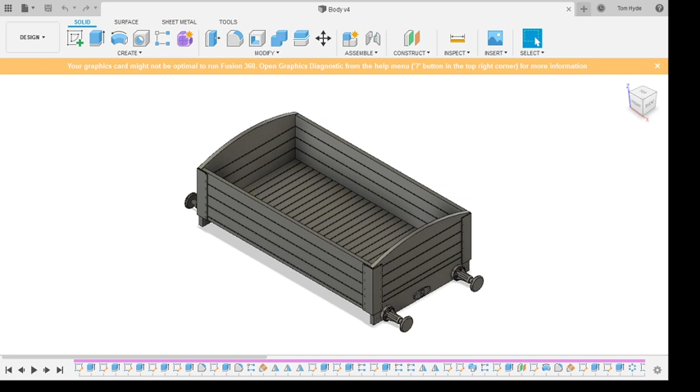1328, this one is. So last week we got through the main process of creating a wagon body. Did all the planking internally and externally, buffers, which was a bit of a faff, but we got there in the end, and did some of the riveting on the corners as well.

Since last week, someone on my RMweb thread pointed out that these rivets don't quite line up properly with the individual planks. So I'm just going to go back and have a quick look at that now in the diagram. And of course, they are right.

So the top ones need to go up very, very slightly, and the bottom ones need to come down very slightly.

One of the useful features of Fusion 360 is if you click on a thing - I think I started with this corner - and have a look down here, it tells you where that thing is. Hopefully. This doesn't appear to be playing. There we go. So these three dashes here, you can see, it's highlighting the thing that is a part of.

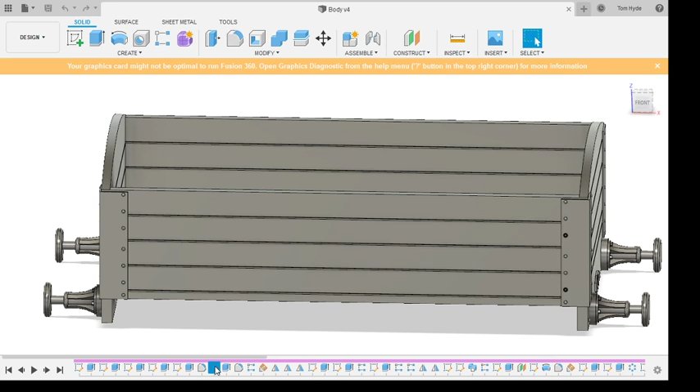So this bottom one wants to come down a fraction. Let's just put some slightly random numbers in here for now. Let's go for 0.75. I should always stick to my own rules of 0.25mm spaces. Really.

Let's see if that's done that. Updated graphics. That's better, not perfect, but better. So that pattern there, as you can see, I select the thing down here and it shows me where it is. That's useful, especially when you've got a lot of patterns going on.

So I want to reduce that distance very slightly, so I can go for 3.75. And let's see where that puts us. I have to do a lot of recalculating for this because it's calculating this side and the mirror and the other mirror over here. That looks much better. That one's pretty much spot on. Those two are pretty much spot on. That one's very close, and those two are pretty much spot on.

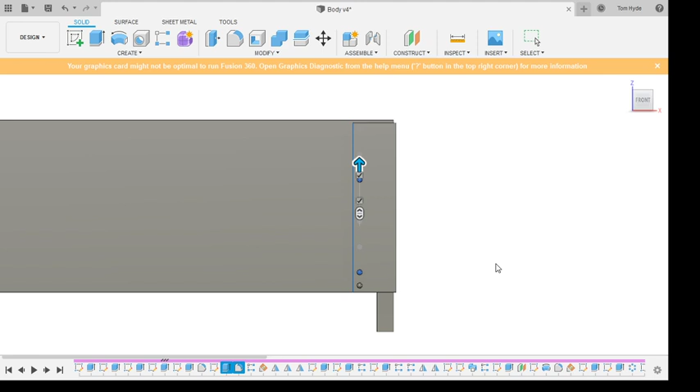We're just making tiny adjustments, going back and forth until we get something approximately right. Now, what did I do with my ruler? So D1328. Excellent. Right, so this bottom plank has 2 rivets. This one has 1, this one has 1, and this one has 2, and they will line up properly.

Perfect. Let's give that a save. Put some new version number in for me, which is all very nice and lovely. So, what to move on to next?

I think let's do some of the strapping on the sides. Yeah, let's go for that. Right. That's going to be some more extrusions and more sketches and so on. This is the part where CAD gets a little tedious, but it all has to be done.

So, actually, let's have a quick look at that diagram. These straps on the sides all seem to have rounded ends, which means we can't just use a normal rectangle, we have to do something a little bit more creative.

Let's cut a circle out, center diameter, or just press C. Now, the thickness we want on those straps is 0.75 millimeters, so we can do that. Hit C again. 0.75 - it doesn't matter where I'm putting these for now, I can put them anywhere really.

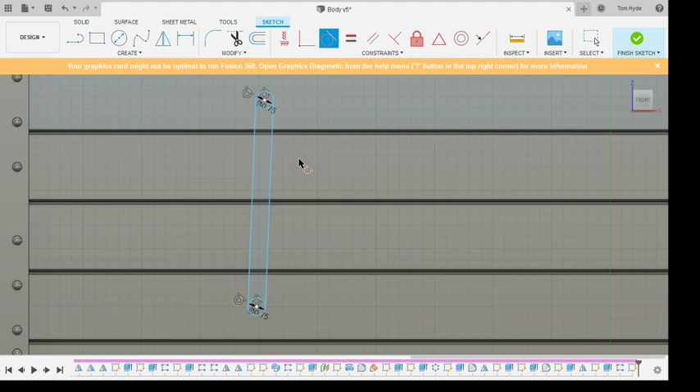And now we're going to make that parallel to something it should be parallel to. Good. Let's dimension that off the bottom there. Let's call that 0.5 millimeter. Dimension that off the top. Let's call that 1.75 millimeters.

That from the end is 11 millimeters. There we go. Job done.

Extrude. Let's pick that, that, and that. And extrude by 2.25 millimeters. Now that's not really what I wanted to do, because we've cut these planking lines in here, it's going to create gaps behind this section, which could cause issues for printing, but also makes the export mesh a little bit more complicated.

So I'm going to try and avoid that if I can, by picking a symmetric extrusion, keeping the same distance both sides, and a join operation. So you can see now, if we zoom right in here, this is filled in, so the structure should stay pretty stable.

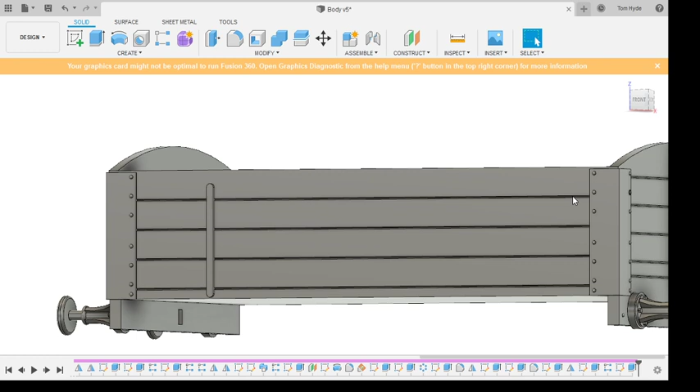Oh, hello, Killian's turned up. How are you this evening? Rather a good wagon, wouldn't mind having a few. Well, you might be able to have a few after I've done this, we'll see how it goes.

Next point, add rivets. 1, 2, 3, 4, 5. Equally spaced and central to the end. So, create another sketch.

Another useful tool in Fusion 360 if you're creating something with a circle. Let's zoom right in so you can see this. I don't know how well this is going to show up because it's not that visible. But you can see at the moment my cursor has a little blue square around it, which is just a generic point - it's snapping to a 1mm grid at the moment. If I move onto the edge of something, it goes to a blue cross, meaning it's now snapped to that point. There are various other points, like here, it goes to a blue square again - that's the intersection between this straight line and the curve. Or if you go to the middle of a circular thing, it turns into this blue circle.

So that is the point I want to start at. I'm going to go for a standard 0.4mm rivet. Extrude that, 0.2, round it, 0.2, good.

Pattern. Again, I'm using a feature pattern rather than faces - that's more or less personal preference, really. And extent, so we want 5 of them, and let's say 20mm. That's quite a bit too high.

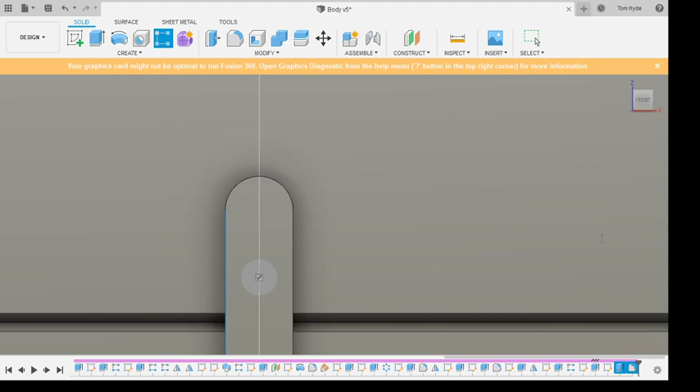I need to line that last one up with this point here. So let's drop that down to 16. Nope. 11, 10. So that line is 10.75mm. So there we go, let's do that.

That's looking all fine and dandy. Right. Okay, that's one of those, and there's an identical one at the other end, of course there is. So let's get the mirror tool back out.

Pick features. Let's see, that one, that one, that one, that one, that one. I want to mirror that in the central plane there. Done.

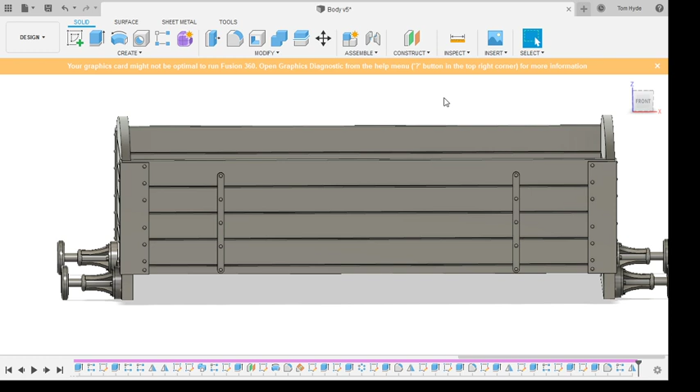Let's go for the central strap, I think, first. Pretty much the same thing again, just in the middle. And unfortunately this one's slightly shorter, so I can't just use the pattern trick and put 3 of them in here.

So you can see, well, you might not be able to see, but when you're drawing a line here, you have the normal blue cross snap to line thing. If you come near the edge of the circle here, it will switch to the circle with the line next to it, indicating tangent, and it puts the tangent relationship in here as well. But obviously it's only done that for the points at the ends where it's snapped to. It's not done that at the start, so we need to do that manually for the start there and fill in there, which is over constraint apparently.

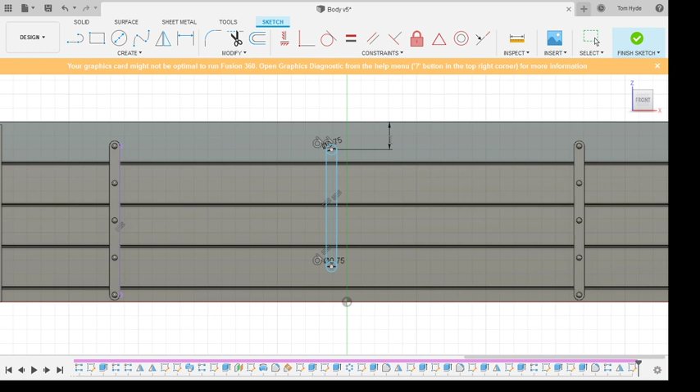Okay, I think it might have done that as I started. Yep, okay, that's fine. Parallel again, let's make it parallel to that. And get the dimension tool out. So that top one is 0.75, and the bottom one is 1.5-ish. There we go.

Looks about right. Yes, I need to dimension it to the middle as well. Because I started all the way back last week, with the centre of the base in line with the centre of the origin, I can just dimension this to the origin, picking that distance divided by 2.

Let's extrude all that stuff again, 0.25.

Do some more sketching and extruding. Let's start at the top this time for no good reason really. That will do.

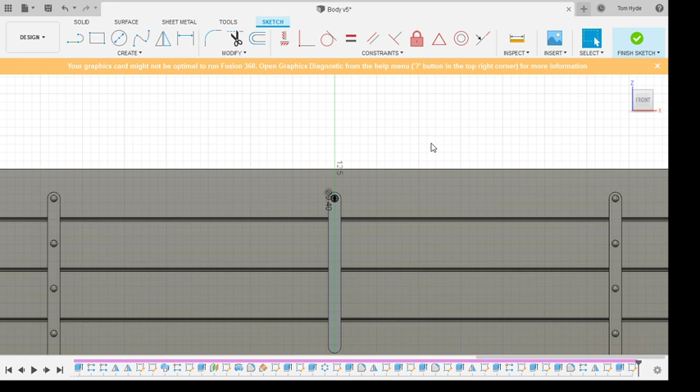Extrude that by 0.2, and around that by 0.2.

Get the pattern tool out again. Pick that and that in this direction. And this time there are 4 equally spaced, so let's pick 4, and...

It's going to start going down, isn't it? So let's say, let's call that 8 millimeters. 9. And so 5, I reckon.

That's a little bit short. That's about right. So I probably should dimension that properly, but being a little bit lazy today. So that will do.

Killian comments about wanting one of the Lady of the Lakes models. Yeah, still working on that. I don't know if you follow Ruston's thread on RMweb, but he's currently building the first prototype of that. He's built a set of frames for it. So he's done the chassis, I've done the body. I think the build of that will be going up on his thread first if you want to keep an eye on that one.

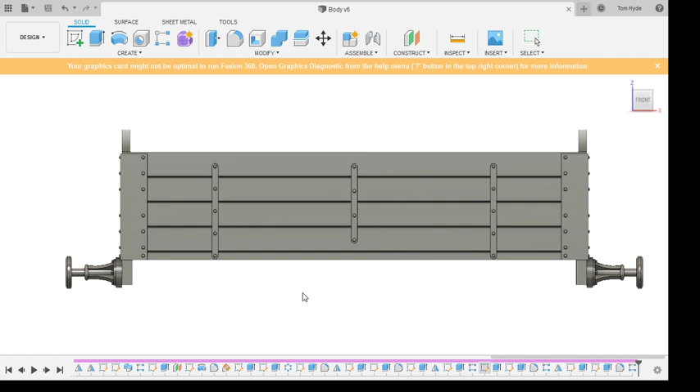Okay, so I have a decision at this point. I could do the main strapping for the door here, or I can mirror these 3 things onto the opposite side first, or I could do the mirror after the door. I'm going to do the mirror now because A, it means I don't have to backtrack too far into the timeline when I want to find the things I'm mirroring, and B, if I come back and change any of this, it only has to recalculate a small number of things in the mirror, whereas if I wait until everything's included, it has to do a whole lot of recalculation, which has crashed my laptop in the past.

So for now, I'm going to pick up on that one there. I want that, and that. And they all get mirrored in that plane there. Job done.

Right, now let's do the door.

Now, door strapping, let's go back and have a look at the diagram first. See, what I should have done, if I was clever, is scan this diagram in, scan a few of the photos in so I could show you what I'm actually looking at while I'm doing this. But, well, I'm not particularly clever because I haven't done that, so you just have to imagine it yourself.

So this door strapping is square. The outside parts start just above the floor panel, and the bottom parts go down to the hinge. So let's do the outside ones first.

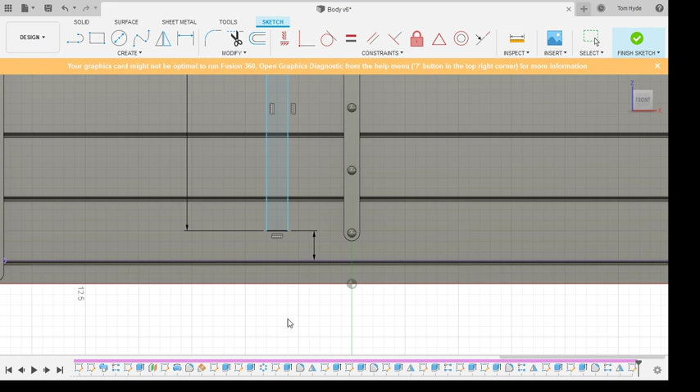Then you can go back to your dimension tool, hit the bits you want, put it at 0.25 above there, and it'll let you put it where you want it. Bit of a faff, but I don't really see any better way of doing it at the moment, so that's the way it has to be.

Let's measure that distance, which is really hard to read. That's 15, 16, let's call that 17mm between the two door straps. I'm going to call that 17mm.

There we go. That looks a tad too long according to the pictures, but not according to the drawing. Let's just nip a tad off the top of that. There we go. So that will do nicely.

What am I doing? Right, extrusion. That and that, 12.5. I think I forgot to do the trick. Yes, I did, symmetric 12.5. And there we go, it fills in that hole again.

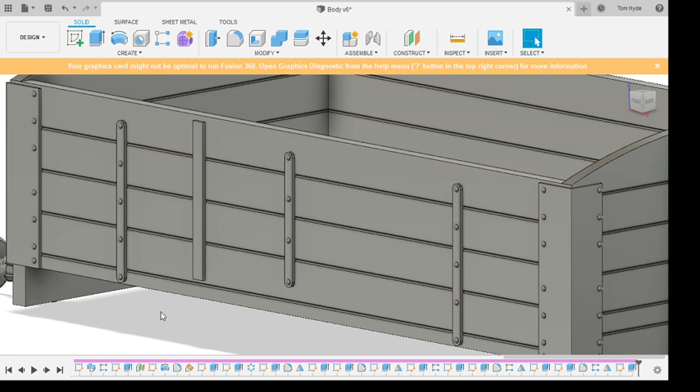So that's probably riveted out, isn't it, as well? Yes, it is. How many have we got on there? 1, 2, 3, 4, all central to the planks they're on. That kind of makes things easy-ish. Can't see that in the photos, it's a little bit too dark, so let's trust that drawing.

Dimension that to be in the middle of this plank, which I think was 3mm tall, which means I don't want that dimension. It means I want that dimension to the middle there, and it is already bang in the middle. Perfect.

I'm forgetting the no blue lines rule because I haven't dimensioned it this way. There we go, let's finish that. Wait for my laptop to catch up. Extrude.

Round, again. And then we want to pattern that upwards. Again, let's click those two, take that pattern - there are 4 of them, and the distance between planks is 3 millimeters, I think, so that must be 9. Quick basic maths.

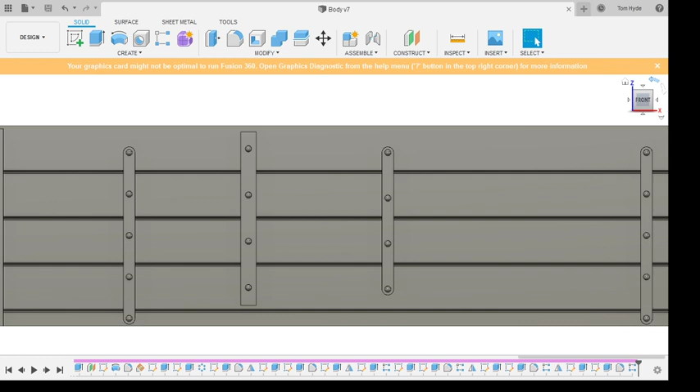Okie doke. Right, keep sketching. Let's do another rectangle - I'm just going to put it somewhere arbitrary at the moment.

And then start dimensioning. So that is going to be 1 - I should probably check these before I say these things. That is going to be 1. Is it? Yes, yes it is.

That's now wrong. What I meant to do was that - 3.4, which actually probably was where that was anyway. Never mind.

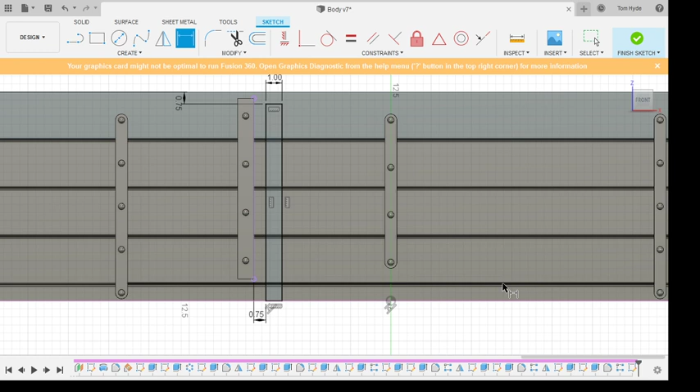So let's call that 0.75. Extrude by 0.25, and don't forget to make it symmetric. And that certainly wants riveting as well, doesn't it? Yes, it does. And again, we have a nice complicated part this time around. Oh, goody.

Okay, this time, because it's not a very nice pattern, I'm simply just going to do it manually. So I'm going to put a guideline in here that I know is halfway across the width. Let's start that at 0.5.

Not that one. Let's just move that up there a little bit. Dimension that here - 0.5.

Dimension that off the top there, which is probably 0.25. Let's call that 0.4. The rivets in here are going to be slightly bigger than scale, so I just have to increase that dimension a little bit to make sure that it isn't actually going off the edge of the part. So center 0.4, lots of circles, 4.

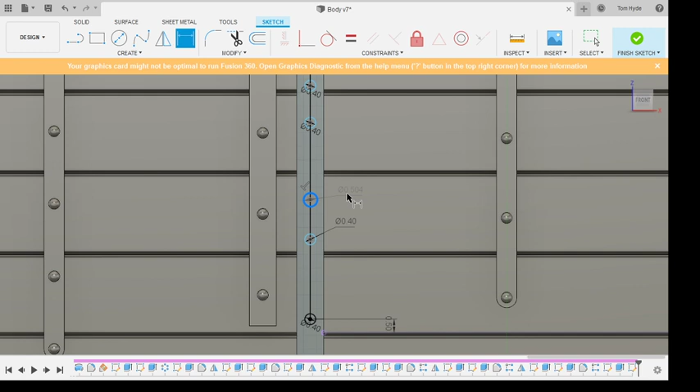One at the end here, 0.4. Dimension, that's 0.4, that's 0.4. This one, I'll just come down to the bottom plank, and it can then be dimensioned here the same as this.

This one wants to be in the middle of the plank, so I have to put the middle of the plank in the line there - 1.5, because the plank's 3mm wide. Same story with this one.

And this one wants to be on from that gap by the same as that. There. So there we go - I couldn't have patterned that at all. This dimension is different to this one, which is different to this one, which is different to this one, which is different to that one. It would take me ages to get that right, so sometimes it's just easier to do it by hand.

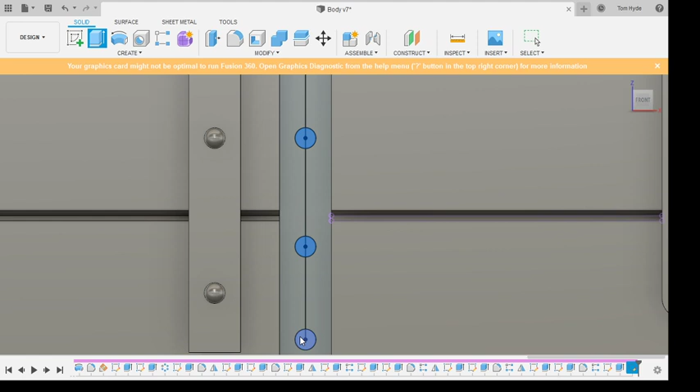We have to remember, because we've got a line in the middle, you have to pick both sides. I could go back and edit this line down here to make it a construction line, and presumably this wouldn't happen, but to be honest it's just quicker to click on all the boxes and extrude those by 0.2. Simple.

And round these by 0.2. Right, cool. See, I picked the wrong edge there, haven't I? That is not what a rivet looks like - that is cut in, isn't it? I'm not doing very well tonight.

So at least I'm doing this accidentally, but at least it's giving me a good opportunity to fix things. So if we pick our selection here, hopefully - the opposite of select in Fusion 360 is to press Control. So if I do that, you can see it shows you the edges you picked. So I want to Control click that one to get rid of it. And then I want to select the edge again, but it won't let me do that.

So I can add another one here, another round, under the same sort of process. Give it the same number, and it should be fine. Now that is also obviously wrong, so I want to edit that and make it a join rather than a cut. Bam.

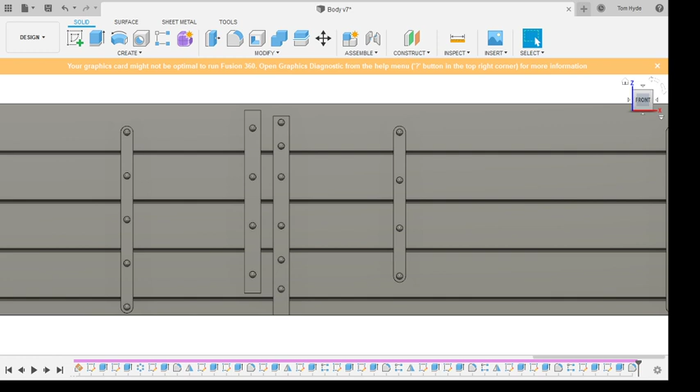So let's put the bottom hinge in down here. I'm going to put a circle in this plane here, and rotate it slightly so I can see what I'm doing. Yes, let's not do that. Okay, so I've just picked an arbitrary point to start a circle, like that. Let's see what that says on the diagram.

Let's call that 0.75 millimeters. And then we'll dimension it fairly close to that so that this section in here is well inside. So let's say... let's go for 0.2, for no particular reason really.

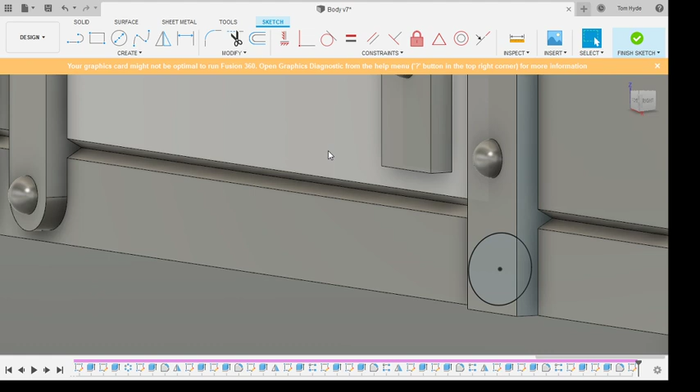So I want that to be just above the bottom there, so that needs to go up a little bit. That looks about right to me. Let's finish that - extrude just this bit. I don't need to pick that bit. Turn it around. This is where a mouse comes in handy rather than a touchscreen. Pick the right edge, draw the two up. There we go, now we have an edge at the bottom.

Last couple of bits to add - a sort of locking mechanism for the top. So we have a sort of D shape that comes out from here. So let's create a sketch in this plane. Put a circle in.

Measure that up, that's about 1.5 mil. Drop that dimension in there, which is about 1 mil. No, it isn't. Measure that properly. Should be about there.

Let's dimension that off the top, which is about 2 mil. So there. Am I looking at this right? I'm not looking at this right.

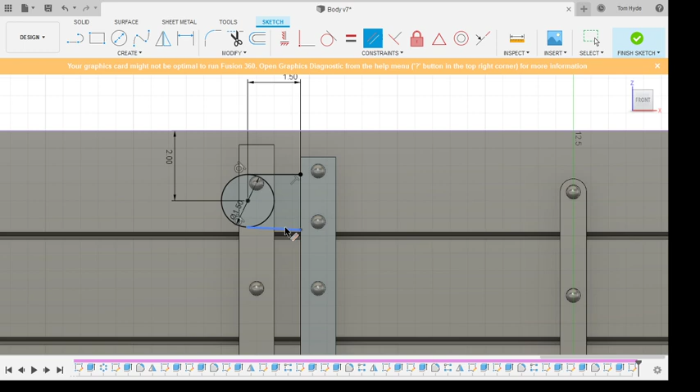Let's pick that point there, join out to there. That point there, join out to there. Tangent both of those onto the circle, make them parallel. They already put the perpendicular relationship in there for me, which was very nice of it.

Finish that. Extrude that and that. Let's go two-sided, I think. So two-sided, extent 1, we want to run out to there so there's no gap behind, and we want to make that join rather than the cut. Now side 2, we'll keep it a distance and we'll make it 0.25.

That's this side for fun. There we go. 0.25. 0.25. Thank you. Right, there we go.

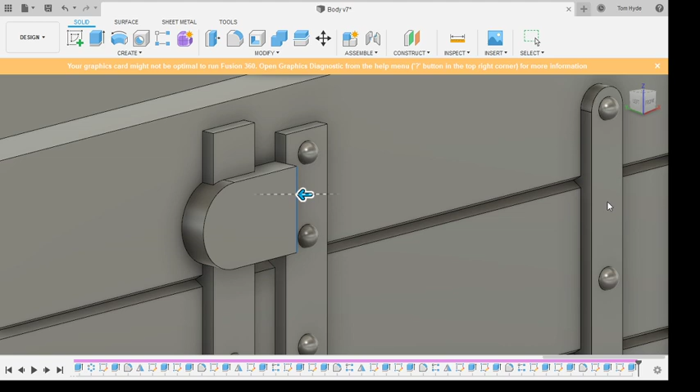And I just want to knock that edge down so it looks like one part, which we do with the chamfer tool here. Let's pick that edge. Don't want equal distances, we want two distances, that way. Let's put in 1 mil, see where that goes to.

Distance 2, we want to be 0.25 because we just extruded it by 0.25. That distance I think needs to be shorter, or somewhere in the middle. 0.75, there we go. So of course in the real thing, this would be a part coming out at an angle like this and then flat, so there wouldn't be any section behind here. On model we can get away with adding that in because it's going to make it much easier to print than having a very thin slice out here. So that will do for our lock at the top.

Now I said I've got these rivets around, didn't I? So let's pick that, which is part of pattern. Edit that pattern, and it needs to go slightly further up, just until that rivet is clear at the top like that.

Let's have another drink and catch up on the chat.

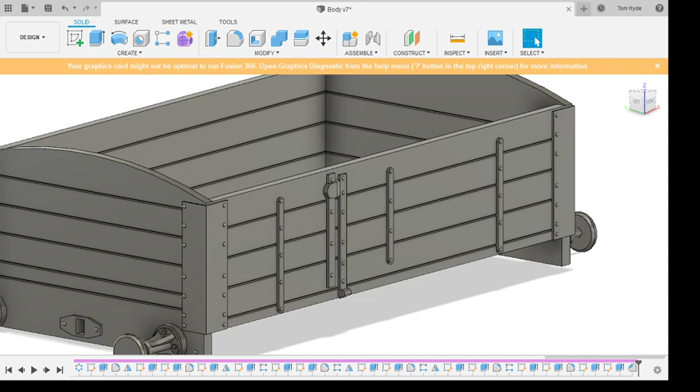Evening Javier. Hope things are going well for you. Incidentally, if anyone has suggestions so I can make this a more useful stream, or more suggestions on how I should be doing the CAD, not how I'm actually doing the CAD, and so on, do let me know. It might take me a while to catch up in the chat because I haven't figured out how to get it up on my screen yet. But once I do figure that out, I will eventually respond.

Okay, so we have our strap, hinge, locking thingy. Let's put a little thing on here to represent the lock latch.

This is just going to be almost entirely randomly dimensioned, really. But bear in mind this is in 00 gauge, so you're really not going to be able to see this, other than the fact that it's there. Let's call that 0.25, and we want to call that 0.5. Nope, 0.35. Again, just doing some quick mental maths there.

Shift that out a tiny bit further, that'll do. And make that into a very small block. There we go. Might not look great from this sort of angle, but once you've got it in 00 scale, you'll be able to notice it, but you won't notice how crude it is. Therefore, that will do.

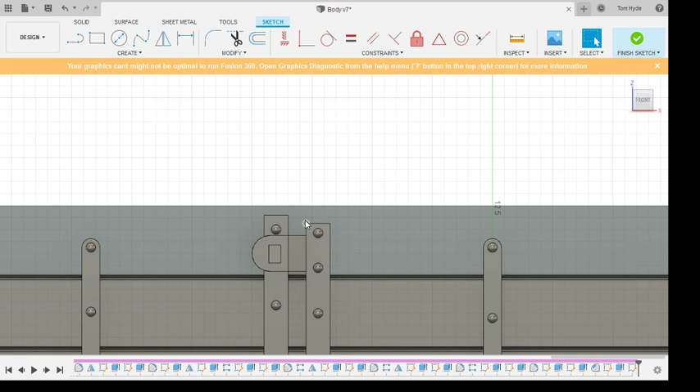So let's make a sketch in there. Just doing this in exactly the same way as I did the stop. Doing this in the same way as I did the flanking for the sides. So I want to make those two equal, I want to make those two equal.

Why did you swap that? I don't know. Dimension that as, I think I did it as 0.2, didn't I? I can't even remember that. I want to be this distance over 2, which I think was 0.75, so let's go 0.75 over 2. Finish that. Extrude that, and I want to cut into space here. Job done.

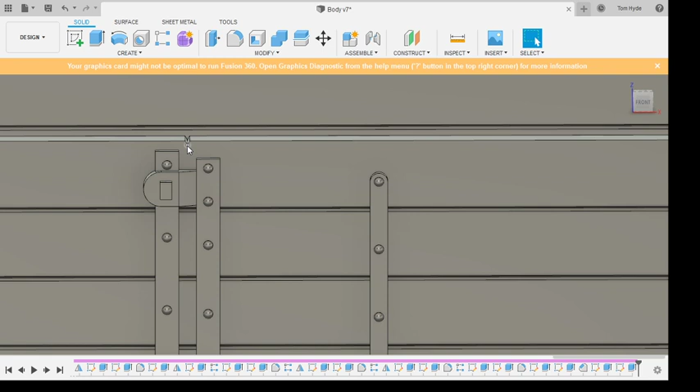Let's put it in this face. Yeah. Now, I've got somewhere I can line up off here. No, I haven't, because it won't let me snap to that point. So I want one there. Let's put that sort of there-ish so it doesn't get upset.

That's equal to that, that's equal to that. And this has run away, so I want to make that coincident to that, which it doesn't want to do. Where you can fail to solve.

Okay, let's do exactly the same thing in a slightly different way. That doesn't want to solve either. Let's try exactly the same thing in a third way. That doesn't want to solve either.

This is mighty infuriating. Okay, I'll put that on there. We can put it on there. Certainly, that'll do. Right.

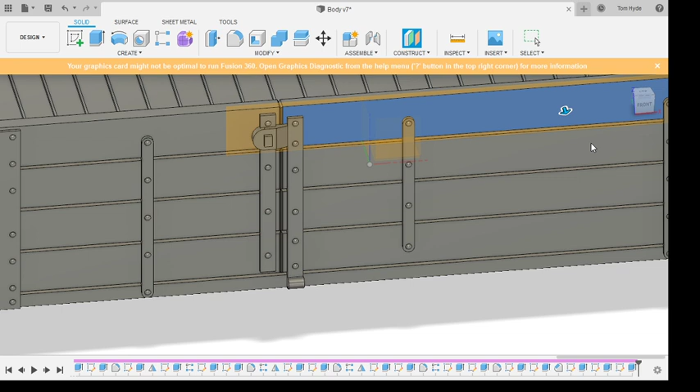So let's create an offset plane with this thing here. Loads of different planes you can choose, and I'm going to use offset from here, and I want it to be half a meter in the opposite direction, so that's minus 0.5.

And so let's turn that thing off so it doesn't get in the way. Right, that's all that gubbins done. So let's get the mirror tool out again and try and remember how far back we need to go.

That's that round, I did that first, didn't I? That's that round, I think we want to start there. Yes, we want to start here. So that one, that one, that one, and so on for all of them. And if anyone wants to remix that, I suggest you don't.

Mirror in that plane there. This looks like it might not like it. Let's see. Failed to solve. Goody.

Now I get to decide why my mirrors don't work. This may just be a case that I don't have enough processing power for this.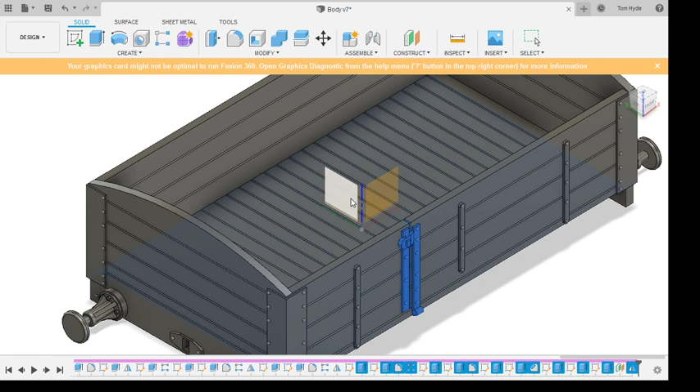Let's pick all of those again, and that, and that one. Compute option identical. No, it does not like that.

So what it probably doesn't like is the rounds. Yes, fillet chamfer. So let's mirror everything.

Probably doesn't like that chamfer actually, is what it is. So let's pick everything except that chamfer, that mirror plane. Is it happy? Think about it. Yes, it's done it.

So for some reason it does not like that chamfer. So what we're going to do is just put it back, 0.25. There we go, so that's that.

Got our vertical cut line in there, got our notches at the top and got the door at the back there. Good. And we get to do all of that all over again.

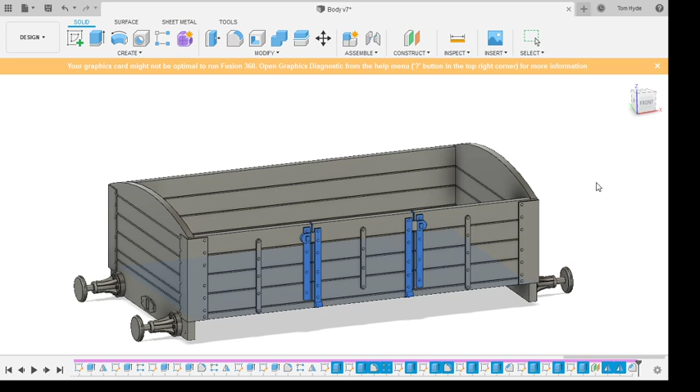But I've already mirrored these bits, so I don't have to go all the way back and find those. I think it's that one, that, etc. Avoid the chamfer, that one, and avoid the chamfer. Chamfers always give me trouble when mirroring, so I don't really know what that's about.

To be fair, I think I did actually put it on, but the planking lines I think I set as 0.1 millimeters. That's really too small for the resolution of the printer to pick up. Hence why I'm going for 0.2, which looks a bit crude here, but I think once scaled down it will look much better.

I need to chamfer these, don't I? So I want that edge, 0.25, and 0.25, 0.25.

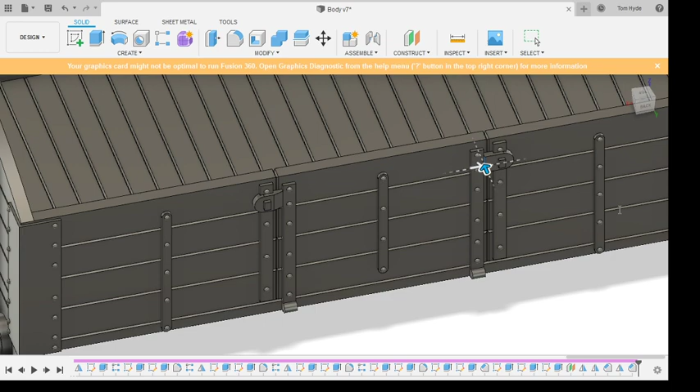No, that's doing it wrong, so let's ignore that. Start again, pick that edge, 0.75, 0.25, chamfer again, 0.25, 0.75. There we go.

Right, so quick look at the chat. I'm still caught up. And we are very nearly an hour in and done that side detailing there. Which doesn't seem like that much for an hour's work, but I don't know, maybe it's just me being slow today. Although it is a fairly complicated part.

So now, I think we need to do the same thing for the ends. Fortunately, the detailing here is a little bit simpler, so if I go and look at the photos again, the strapping on the ends is wood rather than metal. So it should be fairly simple to draw, really.

It's just a big wooden block. It goes right the way down to the bottom of the buffer beam. Yes, it does. Okay.

So let's sketch on this end. Pick a rectangle. Draw arbitrary size. Like that. And that detailing there is

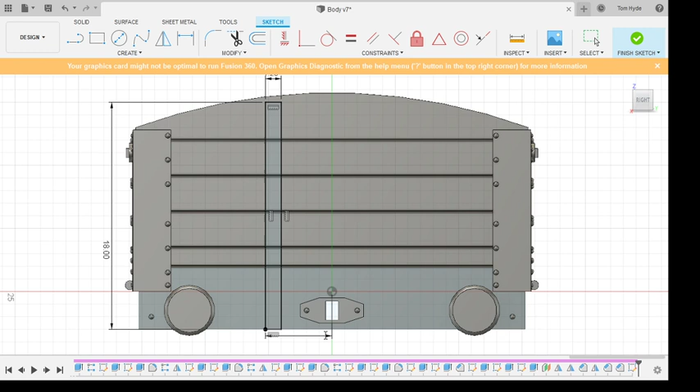There we go. Extrude that by, let's go for 1mm this time, and symmetric again. It's by default turned into a cut, so let's make it into a join. And there we go, we have our big wooden block on the end.

That does intrude into the middle here. That's the disadvantage of doing it symmetric. Let's have a look at the photo as well. That doesn't actually extrude that far, that strapping, which is good news for me. Actually, it's not - there's a bit of a taper on it.

What are we going to do about that? Okay, let's call that 1.5mm, and we're going to have to make this two-sided. So direction 1 is going to be 1.25 because that's the distance. That should be plenty to get it through the strapping. And side 1, let's pick that. We want that distance to be 1.5.

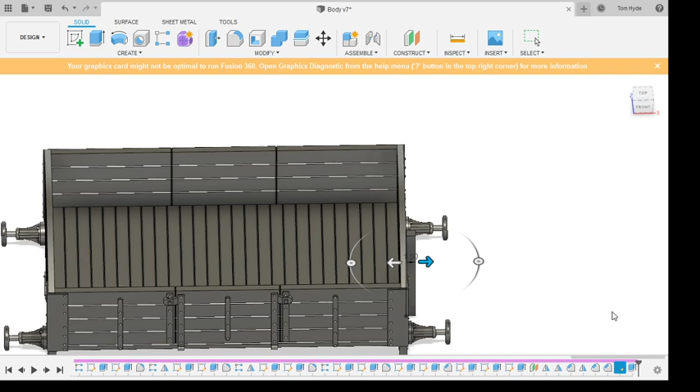And it doesn't like that. I do not like that. 1.5 please. What are you doing, computer? 1.5. Distance 1.25. That is that. Why are you going away? Okay, this is a bug I've not come across before. Two sides, 1.5, yes. Make the other part side 0.25. That side 0.25. Check, check, join, join. And it doesn't want to do it.

Well, let's go back to Old Faithful, delete it and start again. Let's turn the sketch back on. Extrude. That and that. Two sides. 1.5mm. 1.25mm. Okay, that was just my computer being weird. Then let's get it back off.

Does that have a little bit of it? Yes, it does. Ah, that's what that is. That's why it looks like a taper. Okay. This does not taper - it has a metal block at the bottom, so I'm going to drop that down to 1mm.

Put some rivets in there. That's good because it means I don't have to use a chamfer, and then I can mirror it properly without having to redo lots of stuff later on. 0.4. Are they nice and equally spaced? No, they aren't. Probably well, the top ones are. 1, 2, 3, 4, 2.5mm spacing. Let's call that 4.

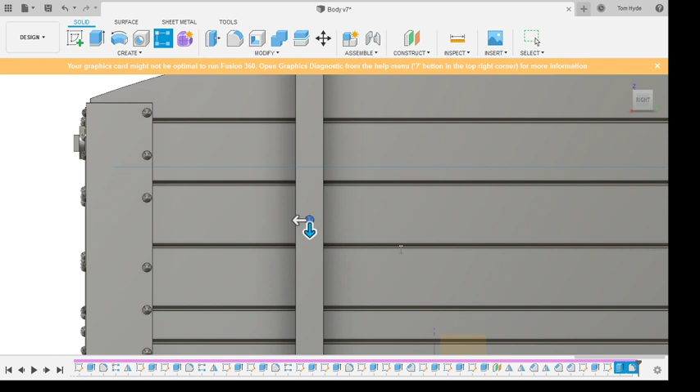Two round, 2, pattern, that and that. I didn't want to do that, but it's okay, I can pick that direction instead. There are 4 of them with 2.5mm spacing, which means 2.5 times 4 minus 1, which is 7.5, only in the one direction. Clearly it's not 7.5 unless it let me down.

That's the job. That bottom was not quite high enough up, so I'll bump that up by 0.5mm. There we go, should be in the middle of this plank here. Good.

67.5, 6.75 please. Or maybe just 7. 7, there we go. Yep, so I look at the diagram. This one has one in the middle of the plank, this one has one slightly lower than the middle, and this one has 2. Good.

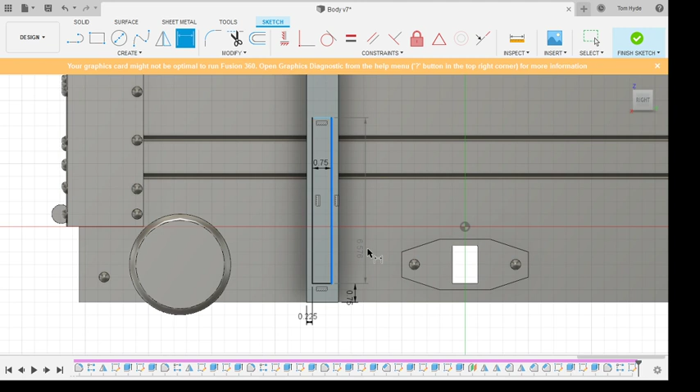Not sketching because we have a metal thingy at the bottom here. 0.75, dimension that the edge should be 0.25, which isn't. No, it's 1.92, isn't it? That would then be 0.45, put it in the centre. We have a gap at the bottom of 0.75 and the total length of that section is 8. So 0.75 and 8. Should take it somewhere below that, which it does. Extrude that.

Let's have a quick look.

Gary likes a fact, but since I'm looking at this chat with a bit of a delay, because I don't have any indication of when messages come up, I don't know what that fact was, but I'm glad it was good for you, Gary.

Let's put the rivets on here. One day I will not have to draw a rivet, and that day will be a good day. 1, 2, 3, 4, again not equally spaced. Lovely.

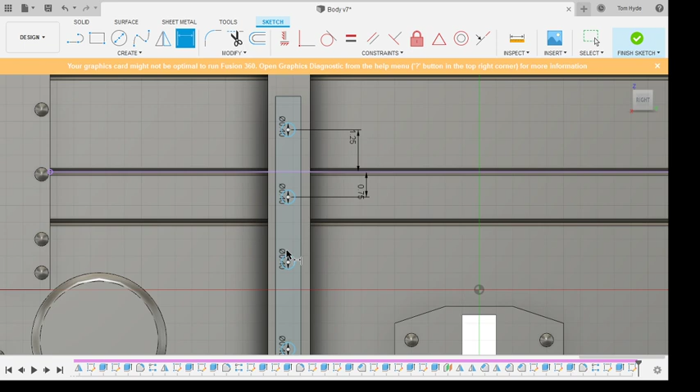So let's do the same thing we did earlier, and just put the rivets in by hand. I say by hand, I'm still using the computer, if that counts. So let's put that in at 1.25 - that should be in the centre of this plank, which would be 0.75. Yeah, that should be in the centre of this plank, which isn't a plank, that's now an angle. Cancel. Let's make that 0.75.

Check dimensions again - 0.75. Wait for the computer to catch up. Which means also then that to be finished, extrude that - 5.2. That, and that, 5.2. Okay. Is our strapping done? Yep, that looks pretty done to me. Goody, time for the mirror tool again, as usual. Mirror tool never gets tired.

That, and that. That way. Same again. Like that.

Oh, my heater started up, so you probably can't hear me. I can't turn that off. Sorry, man. Okay, heater's off, so hopefully you can still hear me, over the fan.

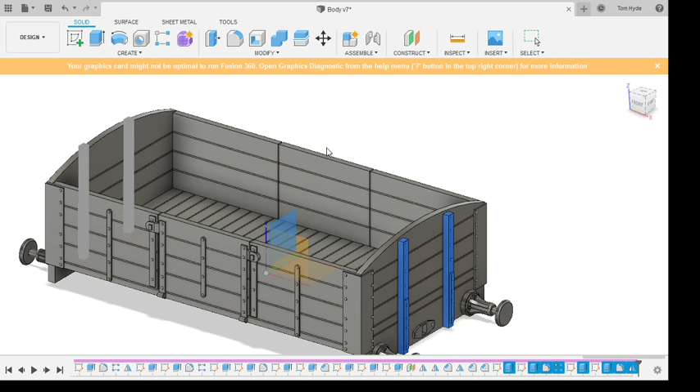I'm not enjoying doing loads of CAD work, but it will do it. So we've mirrored those in that plane, and we've mirrored those in that plane. Give it a quick save.

Okay, well, this is looking rather like we might be nearly finished with the body.

So here again we look into the issues with 3D printing. My laptop is now sounding like it wants to take off - I'll move that around so we get a little bit more air to it. So, yes, going back to the issues with 3D printing, there are a few more details in the body, but I don't think I'm going to draw them.

So the main ones are bits of chain around here - there is no way I'm drawing a chain. And the other main bits are lamp irons on the back, on both sides actually, because these are express-rated wagons, or at least they were in 1887, so they would need to have lamp irons on. I'm not going to draw those because any attempt at those is just going to look very clumsy and overscale. So I'm probably going to do for this wagon what I normally do for locomotives, which is just bend up a bit of staple or old wire or something to represent it. That's a 5-minute job, and it'll do a much better representation of the actual lamp iron scale.

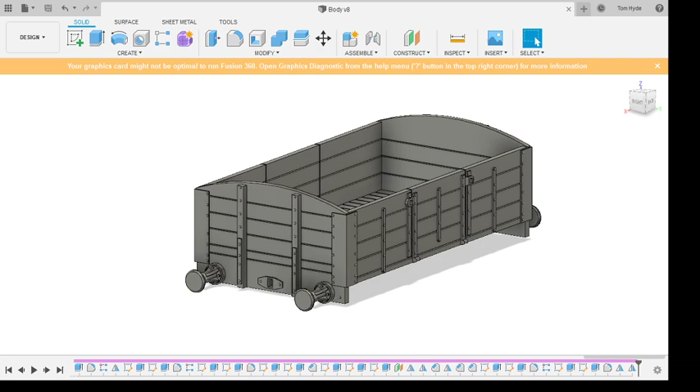Now, obviously the chassis is next. We have a couple of choices here. So I've previously made two wagon models - one of the LB&SCR diagram something-or-other open A, and one of an SER two-plank ballast wagon. They have slightly different chassis styles.

So if we look at the chassis like this, the open A has the sides here printed separately. So you get a body, a left-hand side and a right-hand side, each of which has the wheel bearings in, and you put them together separately. The ballast wagon has the sides as part of the body.

This is going to be quite difficult to describe without actually... tell you what - SER D1328 assembly, very maturely named assembly. Let's see if that opens up, which it does. Lovely. Right, so here is the two-plank ballast wagon.

This is the other chassis construction method, which is a wheel block like this. Can I open that? Where's my open? Oh, come on - not that one, that one. Open. So if it'll open that for me, this is the wheel block here.

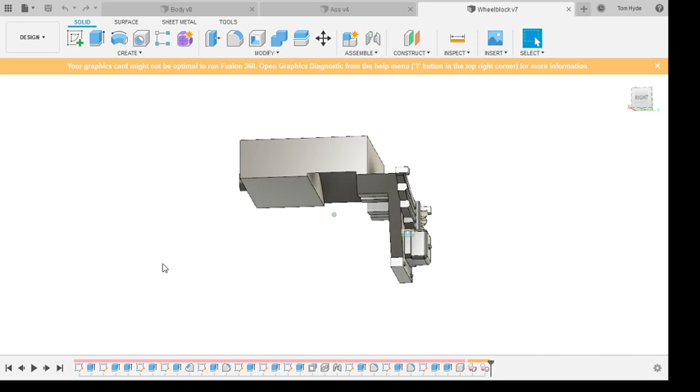So we have the side of the body sits in here. This tucks in behind. The spring is integral. The axle bearing sits in here, and this will locate into another one of these units, which is 90 degrees round, like that. So the idea is you assemble these two as a unit with the wheels trapped in the middle, which is what this circular cutout here is for.

And then you slide that sort of up into the chassis here, and then forwards until it hits the back of this NEM pocket here. So that means you can assemble your wheel sets externally to the wagon, paint it, make sure everything's alright without putting the wheel set in, and then just sliding that in as the last part, which I think is slightly easier in terms of construction.

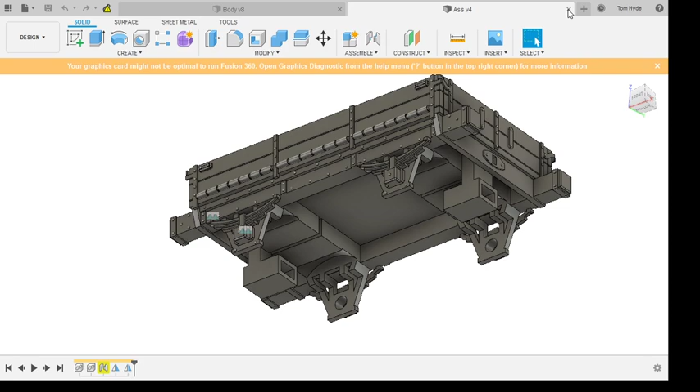Because you don't have to try and hold two wheel sets in at the same time while you glue the other side in, like you would on the Open A. But it is slightly more difficult to model, and I haven't actually managed to get this to work properly yet because of the tolerances between this side and this side once you include a separate part in the middle.

So, the other consideration is this is an SER axle box. The wagon I'm making at the moment is an SER axle box. I could do a little bit of cheating here and steal the previous design, but I think that's probably against the idea of this stream, which is to model the wagon from scratch. So I'm not going to do that, so I'm going to model it from scratch. And I'm almost certainly going to regret saying that.

So let's get on with it. So, decision time. Do I go for one or the other? You know what, I think I'm going to go back to the Open A style. It's much easier to draw. Yeah, let's go for that. The other one with the SER type, I think it's better in principle, but I need a bit more time to work through it and make sure I get all the tolerance stack up right. Yeah, let's go for that. Okay.

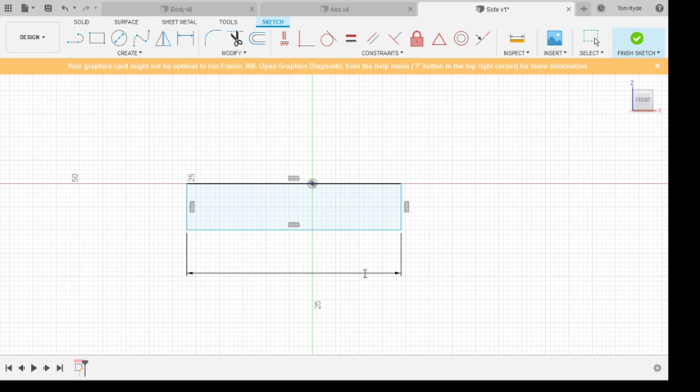Let's get rid of this to free up some RAM. I'm just measuring that off here. So I want to measure that point. Sorry, measuring I should probably explain a little bit better. So the shortcut key for measure is I, and you pick two edges or two faces. In this instance I'm going to pick that face and that face, and it gives you the shortest distance between the two, in this case 53.25 millimeters.

Now, I reckon my printer overprints by 0.1, 0.2 millimeters. So this part is going to be overprinted by 0.1 millimeters this way, this part is going to be overprinted by 0.1 millimeters this way, and the side is going to be 0.1 either end as well, which adds up to 0.4. So I want to make this 53.25 minus 0.4.

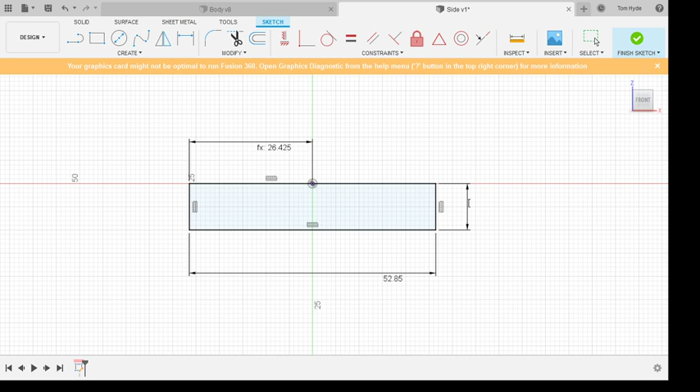And again, I'm going to center that because we're doing a lot of mirroring here as well. Let's pick that divided by 2. And the sides are just under 2.5 millimeters deep. So let's call that 2.25. Hold on a sec. Yeah, that is right.

Okay, that looks a little bit better than it should, but oh well. Let's make that an arbitrary thickness of 2. Yeah, let's go for 2. That should be strong enough.

First thing to add in is probably the W irons and the bearing housings. Let's have a look at that. I'm just going back to the photo again quickly. A little bit of conundrum here.

Yeah, okay, let's do the W irons first, line them up off the back of the side, and we finish about halfway across, so that the spring still has room to fit in underneath. So, I'm going to pick the sketch off the back there, but I'm going to sketch it off the front here. Line it up again, you can use this thing here to line it up to an orthographic view. I can't remember the exact name.

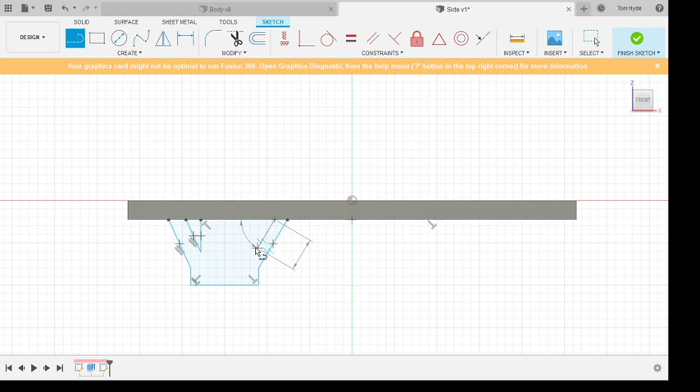Okay, let's just start sketching and see where it goes. Start off that line, put in a rough shape, the outline. This is quite clever, it does pick up on the parallels there. Let's parallel that. No, don't want to finish the sketch. Do that. And then we get our nice dimension to that again.

So that base there is 5mm, top is 10mm. Crikey, it's almost like they thought about the double O gauge modeler when they built this. So that should be 5. That's gone horribly wrong, that should be 10. This is going to mess it up. Yes, it is.

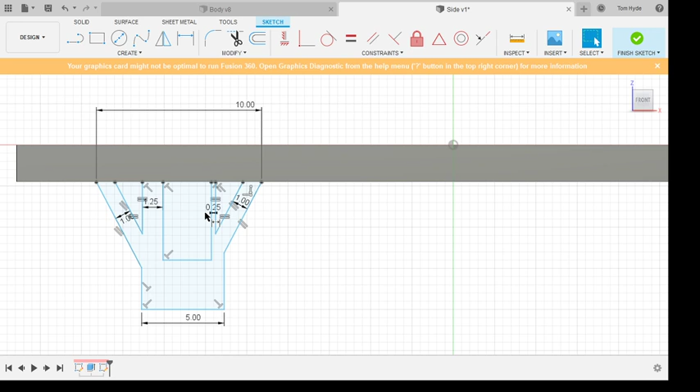That should be equal to that, and that should be equal to that. This dimension here should be 1. That dimension there should be 1.25. That should be 1, should be 0.25. Let's use the clicking and dragging thing to make this make more sense. That should be 1. That 1.25. I can't type.

Okay, let's measure that. That should be 8mm, which it is already. That should be the same as that, which is 1.5. So this is starting to look alright, isn't it? That's fixed, that's fixed, that's fixed, that.

Don't get a dimension for here, so I'm going to make it 4mm, I think. 4. So the spring comes along here somewhere, so I want it to be a little bit lower than the top of the spring, if possible. Okay, so that's measured, that's dimensioned, that angle is dimensioned off there, those are equal. Are they equal? That constrains it.

How about crash Fusion 360? No, good.

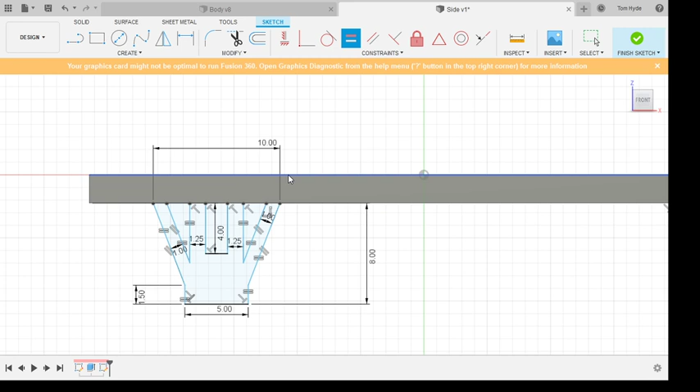And finally, add this dimension. I can't dimension off the end here because I don't know exactly where that point is on the diagram, because we've allowed a little bit extra dimensioning here for the tolerances of 3D printing, so that's no longer a reliable datum point. So you always have your origin as your reliable datum point.

So we measure between those 2 points, which is 17.5. Hang on, that's not 17.5. That is 27.5. Again, over 2 because it's there. Why are these still blue lines? What have I missed? I think I need to make those equal. No, it's already got that.

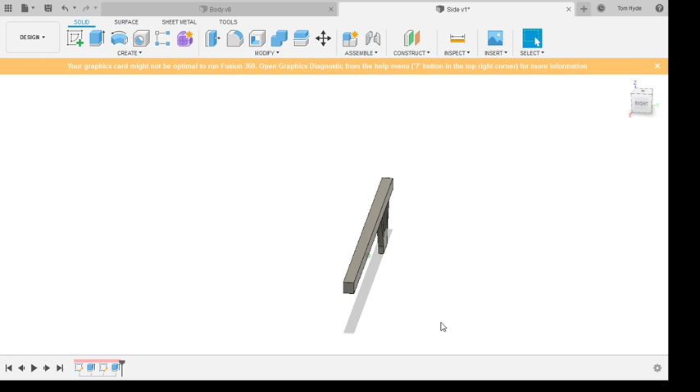So we need a bit of axle box down here and a spring in here. Let's have a quick look at the chat and carry on.

Okay, so we have a rectangle sort of here-ish, which is 3.5 by 2.5.

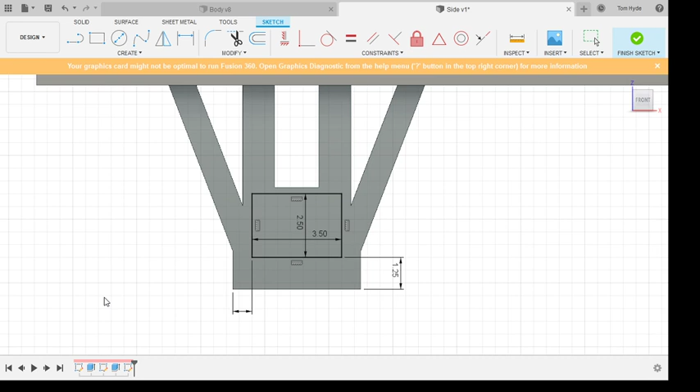It's a couple of mil off the bottom, 1.25. That is 5 minus 3.5 over 2. Let's put the brackets in, got to remember your BODMAS from school.

Put that in, extrude that by 1.25. Okay, and then on top of that, there is the main axle box, which we're going to represent with another rectangle, not extrude, in that plane again, because it goes slightly below and slightly above this rectangle here.

Dimension tool again. Now this is probably going to be a little bit overscale, because it has to fit a double O gauge bearing in it. So that is going to be 2.5. No, it's not, it's going to be 2.75 because I want every bit of space I can get.

That is 4 millimeters, I believe. Just under 3.75. And dimension off the bottom is 1. Now there's a little bit of a curve to that base as well.

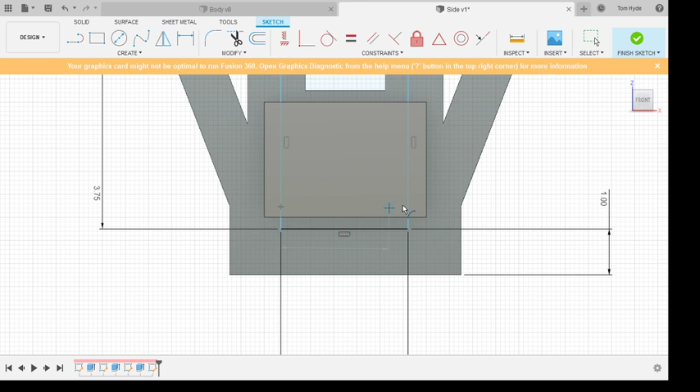So let's put a 3-point arc in by going straight across there and picking up on the centre point. Dimension that there, 0.25, like that. Dimension that there, 0.25, and this is already forgotten about its relationship, so let's put that - not that one - tangent that back onto there, like so.

And then we can extrude this, this, this, this, and that. We'll just sort of guess at the distance really. That looks like 1.5 in both directions.

So let's put that symmetric, distance 1, because then that will come up to the edges - both of those there, not 1.5. And we want that to join like so.

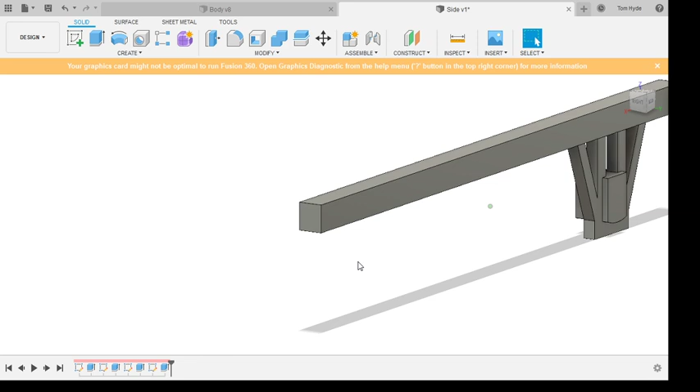There is also a chamfer on the top of that. 2 distance chamfer again. Let's see, 0.75, 0.5 - no, that needs to be a little bit longer. 1, 5, down, 0.75. Let's have that like that.

And then it has some detail in the middle, which I can't really see on the photos, with a sort of rounded edge rectangle with a radius. That's going to be a bit awkward to draw. You know what, let's just do it.

So, rectangle, second rectangle, dimension the distance between the two to be, let's say, 0.5. Cancel, do the click and drag thing. 0.5, 0.5. This is going to be massively overscaled, but it doesn't really matter too much.

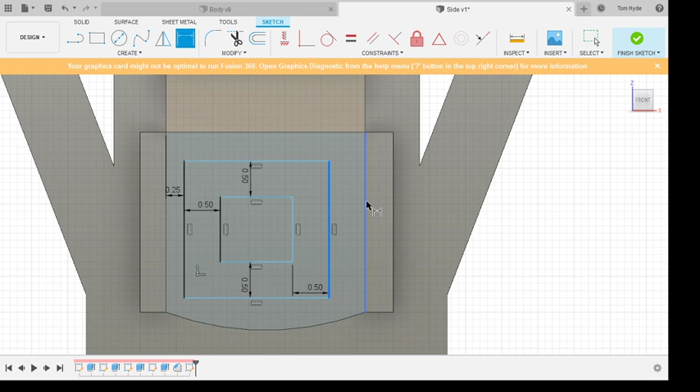0.25, 0.25, 0.25 and 0.25, funnily enough. Again, you can tell I'm not putting too much emphasis on this being absolutely 100% correct. It's a case of being close enough now.

I'm going to fillet these four corners by 0.25, and I'm going to fillet these four corners by slightly more - 0.5 will do. Although technically that should really be more, shouldn't it? That should be 1.

0.75. Yes, because then that is a radius. That is not a radius. That's the same scale as this, isn't it?

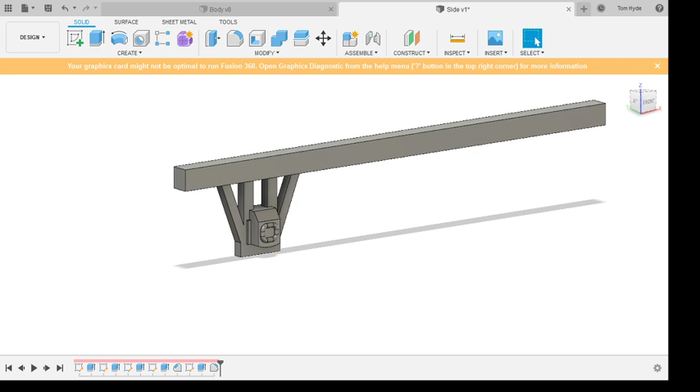So let's finish that, extrude that by 0.25. Round that edge and that edge by 0.25. There, and then we have an attempt at the feature on that axle box, remembering that in real life it's probably maybe this big.

So good luck spotting that. If I make it any smaller and try and get it to scale, it's not going to come out at all. So I think that will have to do.

So let's go and have a quick look at where the axle box needs to go. Let's whack another sketch in. Axle box is a circle with a diameter of something. Now this I can't get off the diagram or anything, I have to actually measure this off a bearing. 2 seconds, I'm going to go and measure this off a bearing.

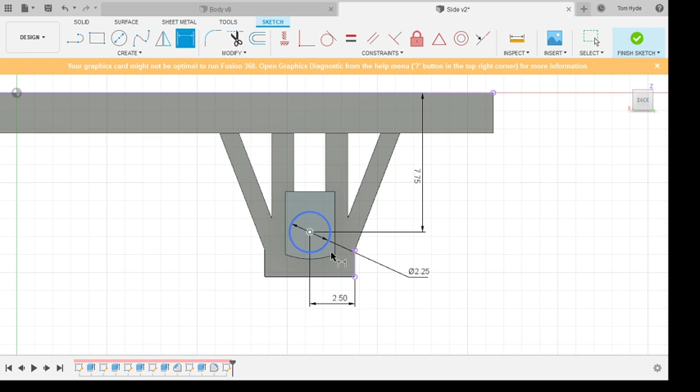So that's now in the right place, that's now in the right place this way, that's now the right depth. And we want to extrude that by minus the depth of the bearing, which was 2.5mm, wasn't it? So we need to double check while we're doing this. This doesn't pop out the other side, which it doesn't, and it leaves a wall thickness of 0.5mm, which is a little bit less than I'd like, but given it's on a fairly small area, I think we'll get away with it in this case.

Right, so that's the bearing hole in place.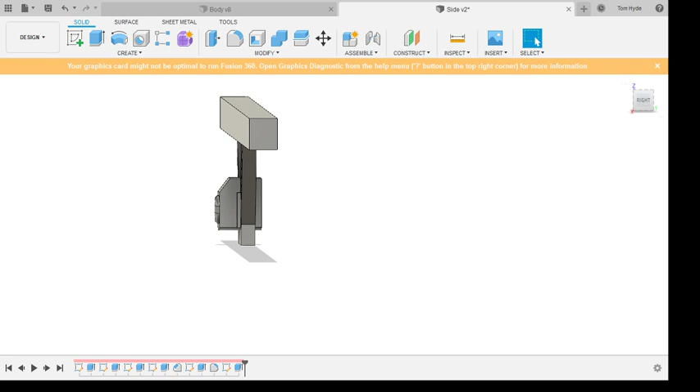Gary's commenting. Well, I'm glad you're enjoying it. I'm sure you could do it, but it's a case of deciding whether you'd enjoy it, really. I don't mind it. Stuff like this isn't that great, but doing an engine is quite fun. It depends whether that's your sort of thing. So, for example, I might be quite good at this, and you might not be, but you might be much better at, well, you are much better at painting and lining and transfers and stuff than I am, so yeah, everyone's got their own bits and pieces that they like to do.

Where was I? Making springs. Yes, that's not going to be fun. What should I do with that? Just having a think about what I'm going to do with the springs.

In the meantime, there's another little bit I forgot to draw earlier, which is the little weird circly thing at the bottom. So that wants to be dimension that, that's 5. That wants to be this plus 2 times the minimum radius of 0.75, plus 0.75 times 2.

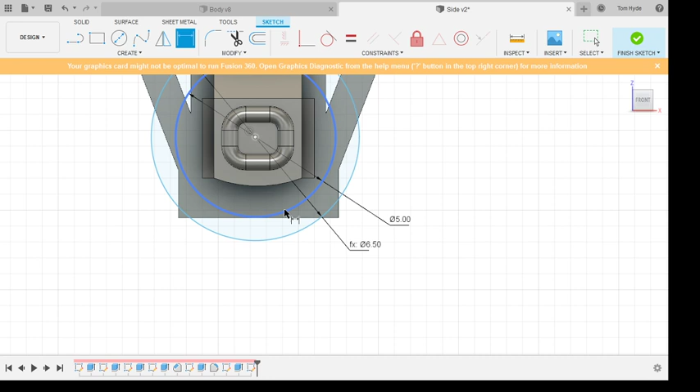Dimension in the centre of that again, that's 2.5. That ideally wants to be a little bit smaller. And that distance from the edge wants to be, this is where we get into maths again. Okay, so this point here wants to be 0.5 below this point here. I should be able to make that work out of that function there.

Yeah, that's quite simple actually. So I want that to be that over 2 because it's diameter. Put that in brackets, minus 0.5 there. Sweet. And we want a rectangle in there that is the same distance apart as these two are here, which is 0.5. No, it's not. It's 0.75, isn't it? Thought that looked wrong.

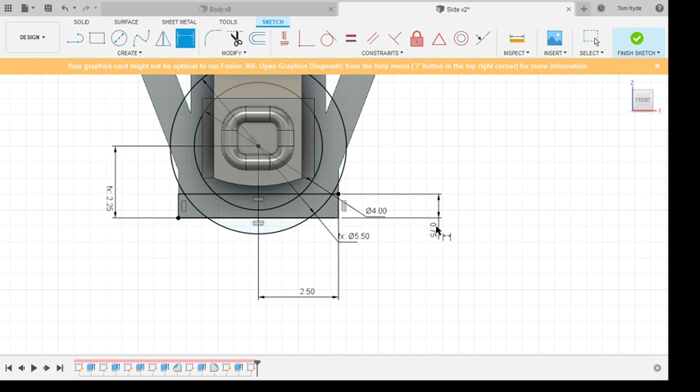And that's done for that sketch. A load of black lines. I want that, and that by 0.25. Only I want this to be in 2 sides, otherwise I'm going to end up with a thin slice there. It's not going to print. So I want 0.25 in that direction and 0.5 in that direction, and I want it to join up. So we have this little thing going on at the bottom there.

And if you thought you'd seen the last of the rivets, complaints sent to the SER, please.

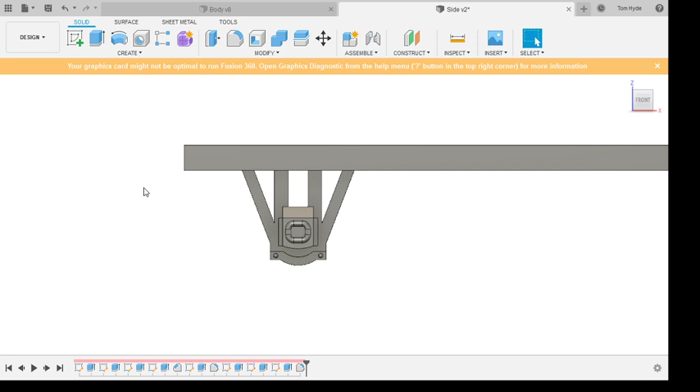But I shall put off springs and try and finish a couple of the other bits first. First things first. I didn't want to do that. Stop doing that. Okay, we shall get the mirror tool out again, and of course mirror pretty much everything.

Again, we've set this up so that the middle plane is the middle plane. That will do nicely. Give that a quick save.

And let's measure that line lined up with that line. So let's measure this distance here. That distance is 0.5 millimeters.

The distance between... Can anyone remember the distance between bearing faces for a pinpoint axle? I might have to go and look this up. There's a set distance. I don't have to look it up, do I?

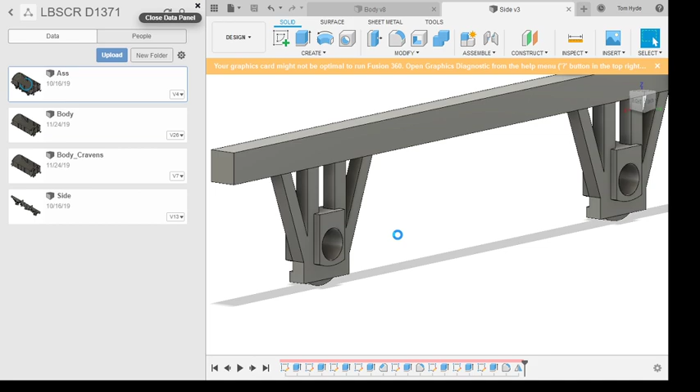Because I did an LBSC diagram 1371, which also has a very maturely named assembly, and was modelled in the same way, so I can steal dimensions off this. Because I know this worked, because I've made it work and Gary's made it work.

So that to there is 24mm. Perfect. So I know that needs to be - I need to include some mounting blocks on the chassis - of the 24 plus 0.5 plus 0.5, which is the 25.

Sorry, I should explain what I'm talking about. So this is the other wagon I've made so far, an LBSC Open A. If I turn the sides off there, you can see, let's line this up nicely, that these locating pins here are where the sides stick on. So you line it up with that.

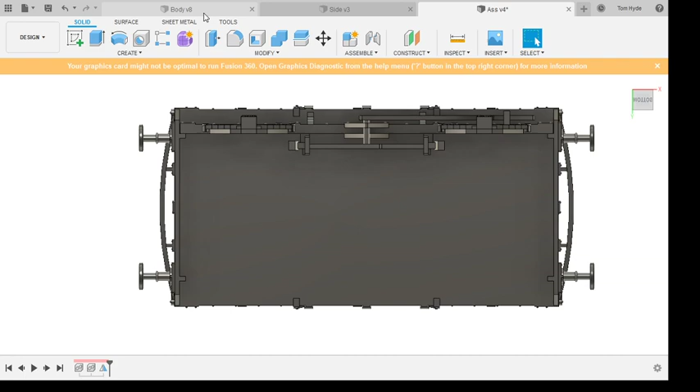So I need to add these points to the main body so I can drop this chassis in. So that's the main body. Let's make an extrusion in this plane here. Make it a rectangle, snap to that point. I want that to be, let's say, 2 by 2.

Let's put the other one in for the other side, 2 by 2. And dimension. So that chassis - those sides, sorry - want to be 25mm apart. So 24mm bearing distance to bearing distance, and the side is 0.5 outwards from the bearing distance. So that wants to be 24 plus 0.5 plus 0.5.

And of course, because we were nice and sensible and set our origin in the middle, we can just say that distance to 2. Extrude that and that to this plane here.

Oh, actually we can measure this, can't we? What's that? That's 3. And the sides are made slightly shorter. Yeah, that's spot on. I've accidentally done that quite well.

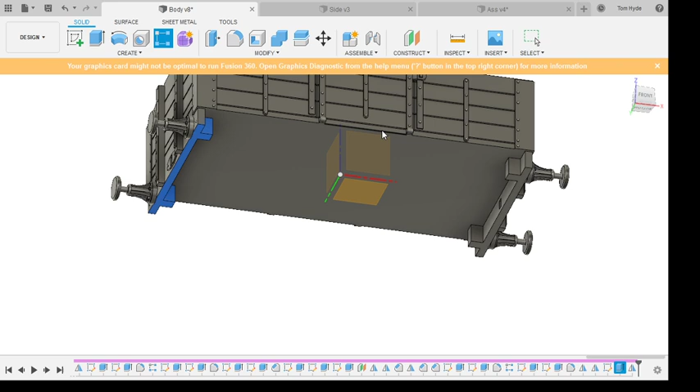So we want to mirror that feature in this plane. I've just had a thought - I know that's a bit dangerous, but I've just had a thought. I'm going to make a pattern. Add that in that direction.

Distance. I can pattern to an object, can't I? I can't remember how I did this before. So let's pick 2 there. That's going to put it beyond slightly. Let's not pick 2 there, let's pick 2 there. And there are 3, so that'll put a block in the middle as well.

So the benefit of this is that, as I found with the Open A, sides warp over time. You can stick them back straight and they'll stay there. But adding an extra block in there to give it something to brace against is just going to make that process a little bit easier.

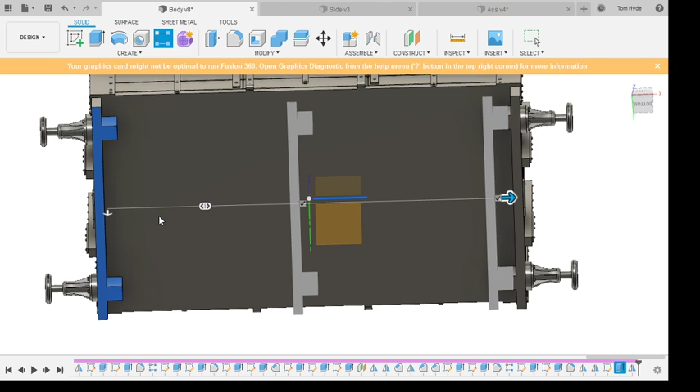The other top CAD modelling tip here is in Fusion 360 - when you do a pattern, you can see a little tick box here, so you can turn individual occurrences off of patterns. So I want to turn this one off because there's already a block at that point. So if it will let me turn that off, which it might not, because it's still trying to give me a distance in that direction.

Let's click on something else. There we go, let's turn that off. And OK, and now we have that block in the middle as well. So that's just to make things a little bit easier to assemble.

Click save. Now we've got time, I think. Yeah, I'm going to keep my immature name. Deal with it.

I'm going to bring this side in here. I'm going to put it up by my arbitrary amount of 50mm, just so that it's not in the same space. Now, assembly in Fusion 360 is not massively intuitive, but you want to use this tool here, which is joint.

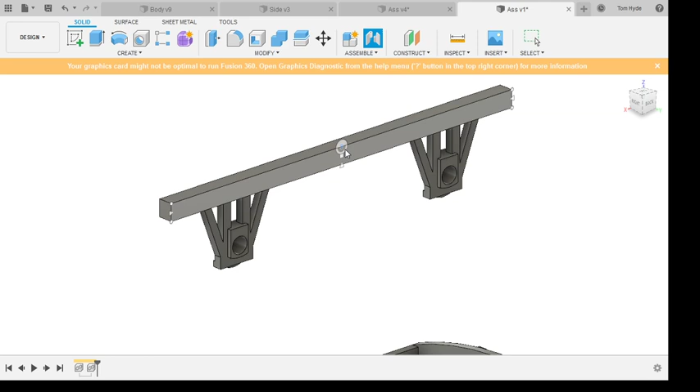Now, you can see it produces this little circle that sort of snaps to various places. You want to pick a point, so we're going to pick the middle, making sure the circle is flat, aligning this face here. So we want that point there, which is the back centre of that axle on that side. That's the other reason I put these nubs in here, because we can pick that point there and it should drag it straight into place for me. So that is now aligned with this here, and should be aligned centrally as well.

Which it isn't quite. There's a bigger gap at this end than at this end, which I suspect is because that might not be quite central. I'm going to OK that joint, but clearly this point here is not quite central, so I need to sort my pattern out.

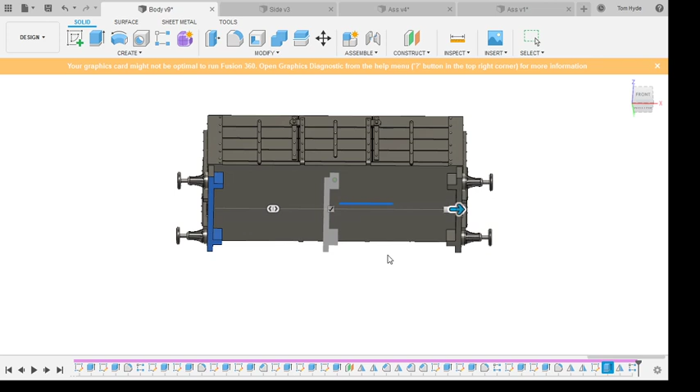Now, why are you not quite central? So I was picking up off this point here, dropping that in the middle. Let me save that. In Fusion 360 you have to save a part before any additional parts will come up in it. So now I've saved that, and it hasn't changed, but it has put this little warning sign here and here. So you click this and it'll update all the models you've changed since your last edit. Click that and it should update, and it hasn't.

Which is a little strange. So if you click on a part here, it will highlight it in blue for you. So I'm clicking on that there, lining them both up to the front to try and get an idea of where this is actually meeting. So there's a tiny little gap there. Let me scroll down. So there's a tiny little gap there. And yeah, we can see this isn't, if this is central, this isn't.

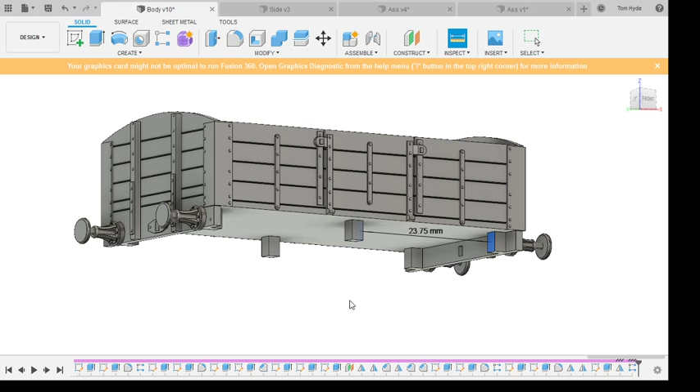So I need to shift this by 0.25 over 2 that way. Let's close the measurement tool, edit feature, shift that by plus 0.25 over 2, that one.

Which actually it hasn't done, has it? Because that's a pattern over the whole length. Do I want to shift that by 0.5? So a quick visual - that might have gone too far the other way now. I probably should have just drawn these separately rather than try to put them in a pattern, but hindsight is a wonderful thing. That's now 23.5.

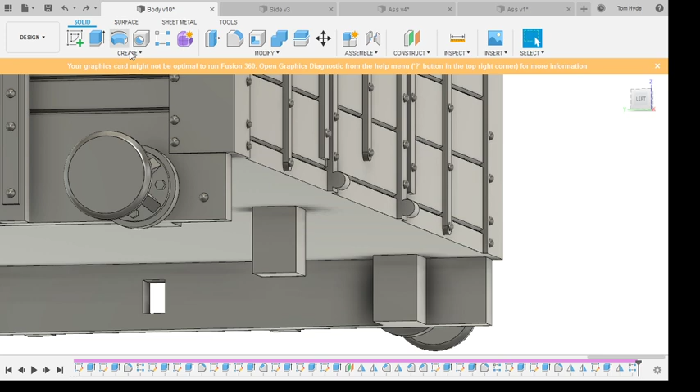Okay, maybe I did have it right. 23.75. Yes, I need to shift it back the other way now. I will get there in the end. 0.25. So now 23.675, hopefully - 625, sorry.

Let's see if I haven't managed to mess that one up. Reload. Should shift. Hope the program hasn't crashed. Oh, we have crashed. Hey, we have crashage. It's not gone well.

Well, I suppose that's as good a point to stop as any.

So the plan for next week is to finish off that side, add the spring - okay, Streamlabs is crashing as well now, this is not going well - so the plan is finish that off, finish that spring, draw the brake, and hopefully we can set it up in the 3D printing slicer software as well. And at that point, that will be all the computer side of the model done, I think.